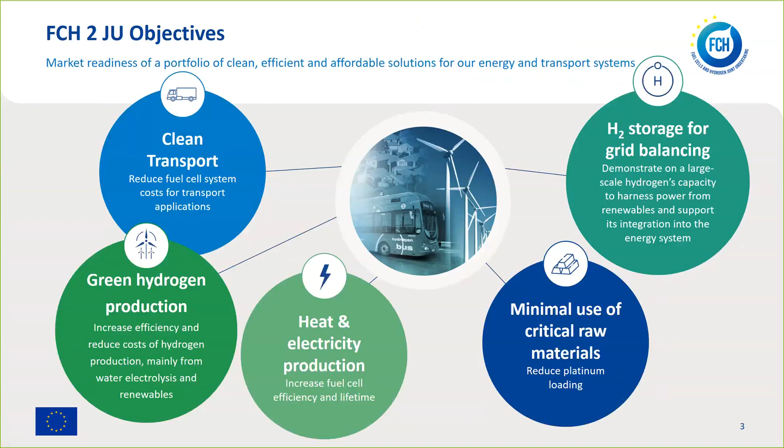The FCH has 5 main objectives. 2 are related to fuel cells and their application to transport or stationary CHP applications. 2 related to hydrogen, green hydrogen production through electrolysis, and hydrogen for energy storage and renewable energies integration. The 5th one being the minimal use of critical raw materials.

The FCH exists since 11 years, and it has supported 244 projects to date, to an amount of almost 900 million euro. That was matched by similar funding by industry. So we're talking of a total of 1.8 billion euro budget. These 244 projects fall under energy, transport, or cross-cutting areas.

Focusing now on hydrogen production. In the early days of the FCH 11 years ago, hydrogen production was a facilitator of fuel cell applications in transport and energy. So hydrogen was to be produced through electrolysis from the power grid using renewable energy, and it was for a power-to-power application through stationary fuel cells or used in transport in hydrogen fuel cell vehicles. There was always the question, where will the hydrogen come from?

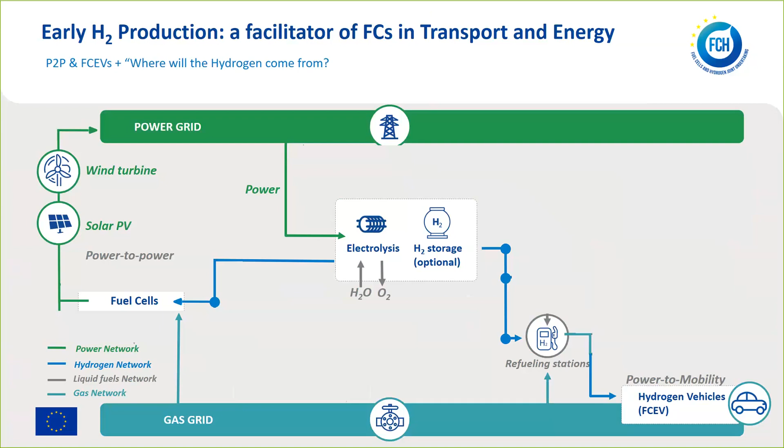Well, today it's a much more complicated picture, where hydrogen is recognized as an enabler of sectorial integration. The revolution has actually happened on the left. It's renewables, where the cost of PV panels dropped in the last 10 years by 80%. The cost of onshore wind is 7 euro cents per kilowatt hour. So a lot of low-cost green electricity going to the power grid, also causing some stability issues.

Similarly, the electrolyzer industry has come up with larger capacities of dynamically operating electrolyzers, capable of producing large quantities of green hydrogen. These quantities, moving to the right of the slide, are now becoming of relevance to industry: industry that is using hydrogen today, like the ammonia industry, or industry that could use green hydrogen in the future to clean its act, like the steel industry through direct iron ore reduction.

Refineries are using hydrogen today, and they could also use green hydrogen in their processes. All these large quantities would facilitate the use of green hydrogen also in the transport sector, not only to vehicles and trucks, but going also to trains and marine applications.

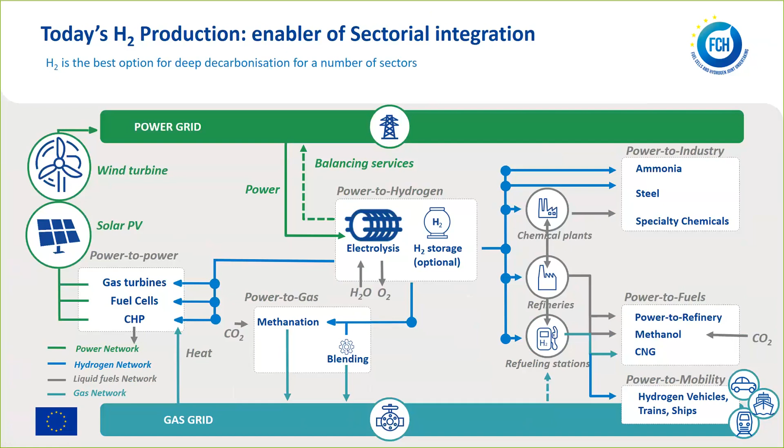Interesting to note in this slide is the balancing services that electrolyzers can offer to the power grid that can improve the finances of such investments. Now, the FCH, thanks to the two objectives that we have on hydrogen, was well positioned to support this role of hydrogen for sectorial integration.

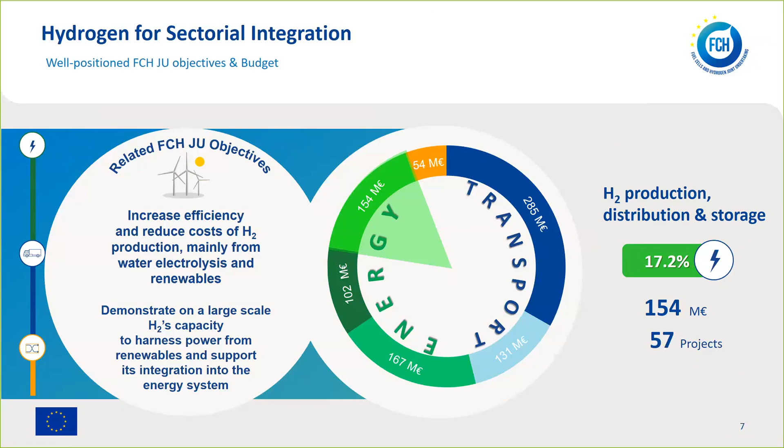We have supported till now 57 projects on hydrogen production, distribution and storage. And here you can see the different routes for hydrogen production. Today, of course, it's mostly fossil fuels, but the routes that the FCH has been supporting are these blue routes, and it's mostly hydrogen from renewables.

If you look at the number of projects now, you can see the majority is on electrolysis, but we have also supported the thermolysis of water from concentrated solar, photoelectrolysis, gasification of dry biomass, biological routes for wet biomass, reforming of biogas. Nuclear energy is also there. I know that some countries are interested to follow that route. The US has recently expressed interest in this route.

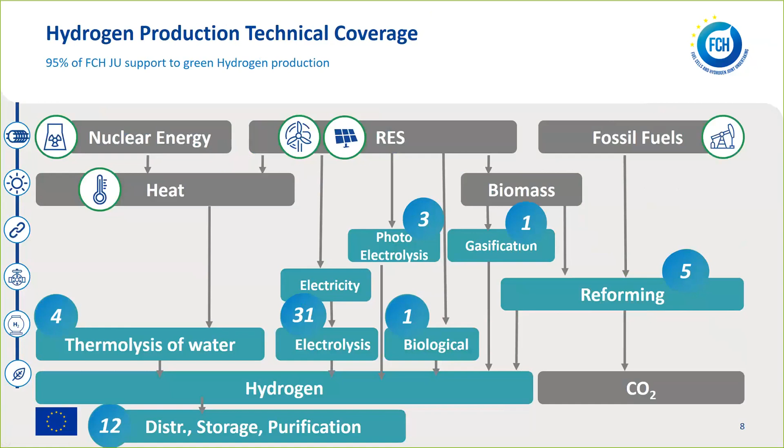Going back to electrolysis, it's very clear this is the main workhorse for green hydrogen production. And here you can see on the left the support to our 31 projects, up to 100 million euro, to different types of electrolyzers. PEM electrolyzers enjoying the lion's share for research projects, but also for large demonstration projects. Then it's solid oxide electrolyzers, low TRL technology, so a lot of research funding, but also now moving to demonstration. And then also support to alkaline or proton ceramic electrolyzers.

Moving to the right-hand side of the slide, there is an interesting schematic. It's not, let's say, a scientific graph. It's more of a schematic, where in blue bars, you can see the increasing capacity of the electrolyzers of our largest demonstration projects, going from 150 kilowatts in 2011 to 10 megawatts in the 2017 call to 20 megawatts in the latest call that we're currently negotiating to sign a contract.

Also of interest is these red dots that signify the FCH support in millions of euro divided by the megawatt of electrolyzer installed. So it's an indication of the way the cost of the electrolyzer drops with increasing capacity, but also hopefully with the improvements in the reduction of cost of the electrolyzer industry.

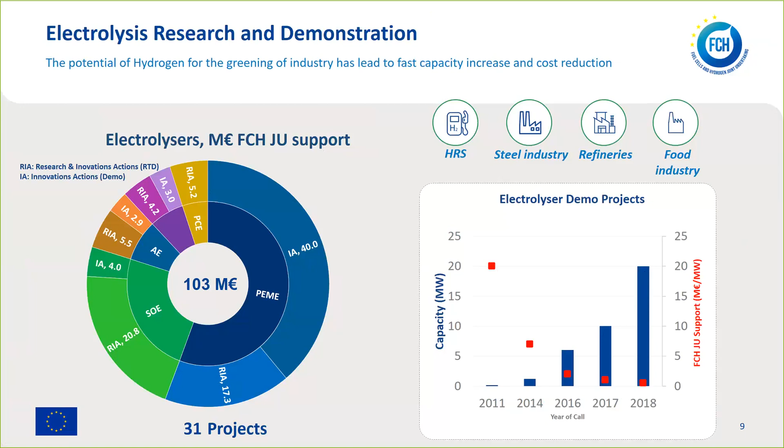Let's see some examples of our largest demonstration projects. This is the 2014 project called HyBalance. It's a 1.2 megawatt pressurized electrolyzer by Hydrogenics, installed in an Air Liquide facility in Denmark. It was commissioned last year. Hydrogen is feeding a light industry, but also buses, a transport application. It is receiving support both from us and also a national Danish framework.

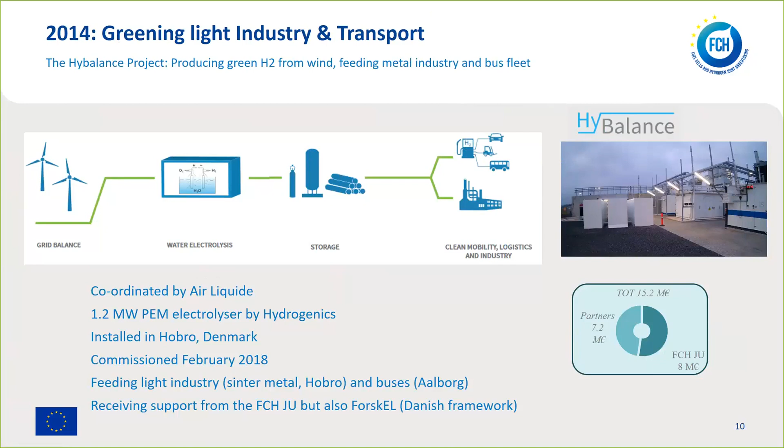The 2016 call project H2Future for the greening of the steel industry. This is a 6 megawatt PEM atmospheric electrolyzer developed by Siemens, a project coordinated by Verbund, the electricity company of Austria, and the unit is installed in voestalpine, a steel industry in Linz, Austria. Hydrogen is injected in coke oven gas, but the long-term view is the direct iron ore reduction through hydrogen.

Austria has currently a favorable electricity tariff system for electrolyzers. They're exempt from some tariffs, some taxes. The steel industry, I should note here, is a great proponent of green hydrogen at commission level.

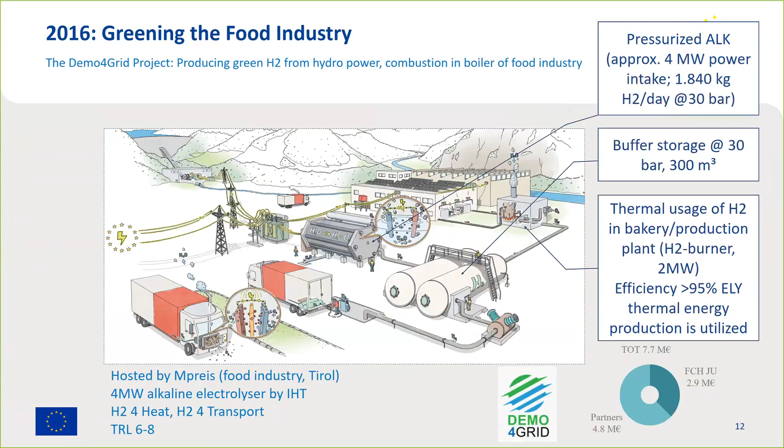At the same year, 2016, we had the Demo4Grid project, which is green hydrogen in a food industry. This is a 4 megawatt alkaline electrolyzer by Swiss company IHT. It's a clear displacement of natural gas in a hydrogen boiler. The longer term view is also to fuel trucks for the distribution of their products.

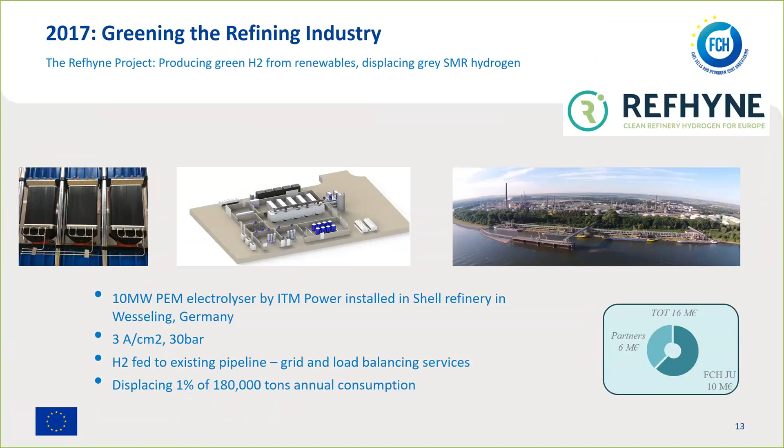The 2017 call project REFHYNE is a 10 megawatt PEM electrolyzer by ITM Power to be installed in a Shell refinery in Germany. It's a high current density electrolyzer delivering hydrogen at 30 bar, and this giant electrolyzer for us is eventually going to be displacing only 1% of the annual consumption of hydrogen at that refinery. Also to note here is the 20 megawatt project that we are currently in the process of signing.

Besides the large demonstration projects, we also support research, game changer electrolyzer projects from 2017, aiming for electrolyzers operating at 100 bar, current densities from 4 to 8 amps per square centimeter for PEM electrolyzers, also looking at proton ceramic electrolyzers.

In this year's call that is currently open, we have a topic on new anion exchange membrane electrolyzers, and this particular topic is open to international collaboration, and this could be of relevance to members of the IPHE. To note is the deadline for submission is the 23rd of April this year.

Also in this year, we have two important topics for large demonstrations of hydrogen injection in the natural gas grid at the distribution or the transmission level, so lower and higher pressures. All these projects have contributed in creating a vibrant community in Europe of equipment manufacturers or R&D institutions that are meeting the key performance indicators that have been set. There are still issues like improved dynamic operation, testing harmonization of electrolyzers, improving degradation diagnostics, but still it's a healthy

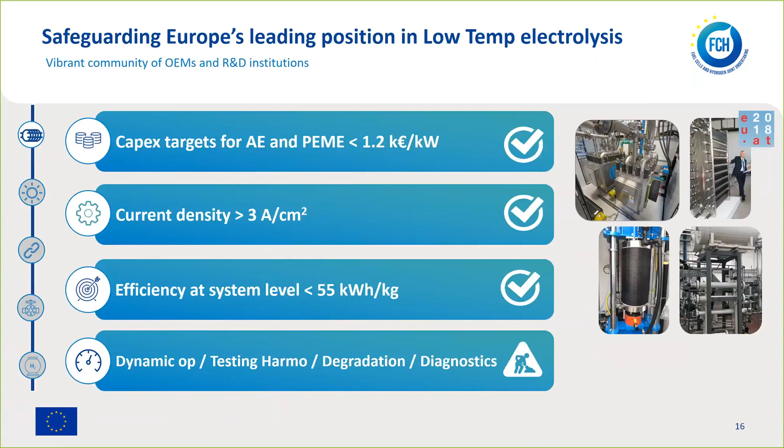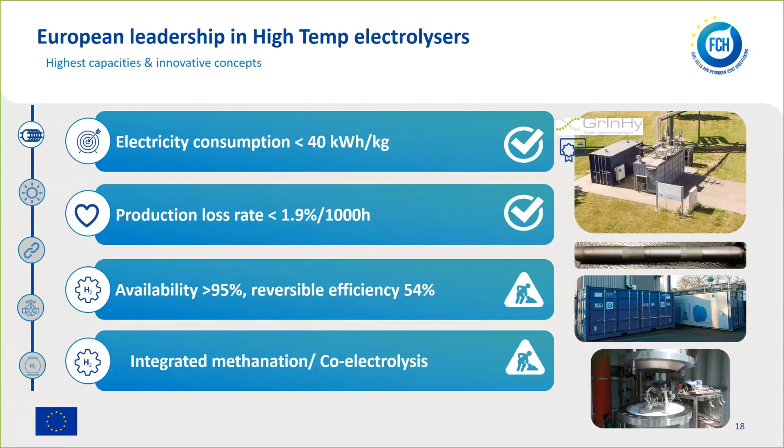Now, further to these research projects, we also try to support our industry through some studies. This is an example of a study on the early business cases for hydrogen and electrolyzers. And you can see the payback time of electrolyzers for different industrial sectors and how this payback time can be improved if electrolyzers can contribute in providing electricity grid services.

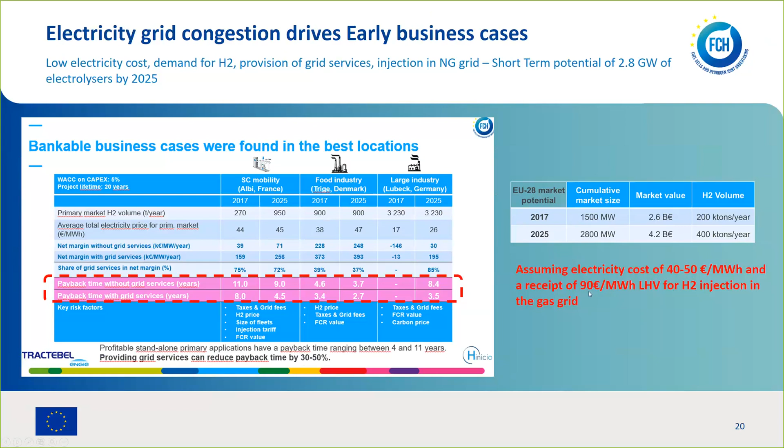Now, this leads to the conclusion that there is a 2.8 gigawatt of electrolyzers market in Europe by 2025, which is equivalent to 4.2 billion euro. And you can also see the assumed cost of electricity, so 40 to 50 euro per megawatt hour. We never assumed a zero cost for electricity in this study, and the receipt for this green hydrogen to be injected in the grid equivalent to biomethane rate.

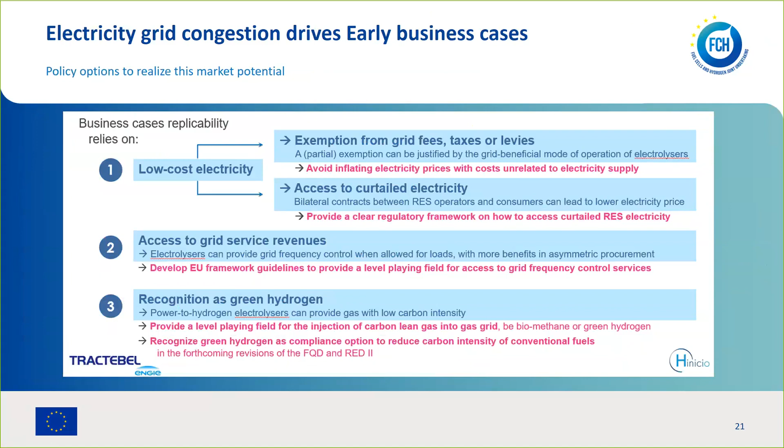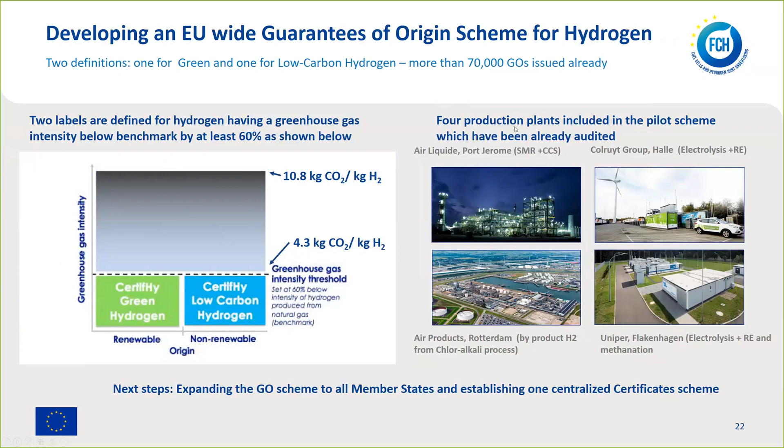This study also identified the conditions for these business cases, which is the low electricity cost, access to grid service revenues, but also the recognition of green hydrogen. And for this, the FCH is also supporting the CertifHy project and later study for developing guarantees of origin for green hydrogen. Actually, there is a definition of green hydrogen from renewables and low carbon hydrogen, which is at least 60% below the emissions from an SMR. We have already issued 70,000 such GOs, thanks to the 4 pilot projects that are currently following this initiative.

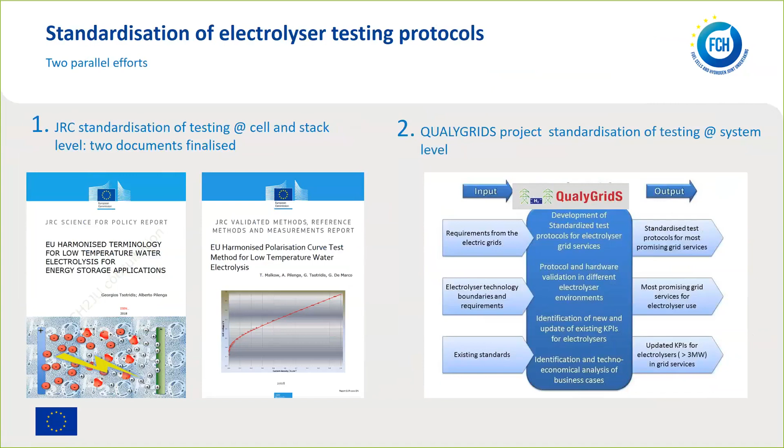And with this, I would like to conclude in that terms like sectorial integration, energy storage, decarbonizing industry, and the gas grid have become mainstream energy policy terms at the European Commission, in countries, in industry. In this, hydrogen is recognized to play an important role, and the electrolyzer is a key technology. The FCH has provided continued support to the European research community and to industry in moving electrolyzers from few kilowatts to megawatts today, improving the performance and reducing costs. And of relevance to the IPHE, we are open to international collaboration.